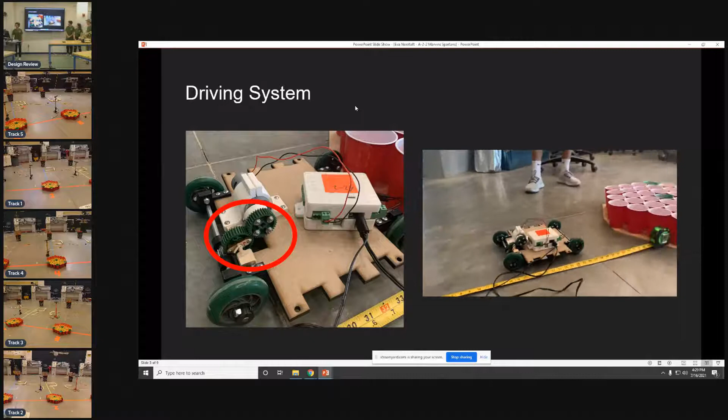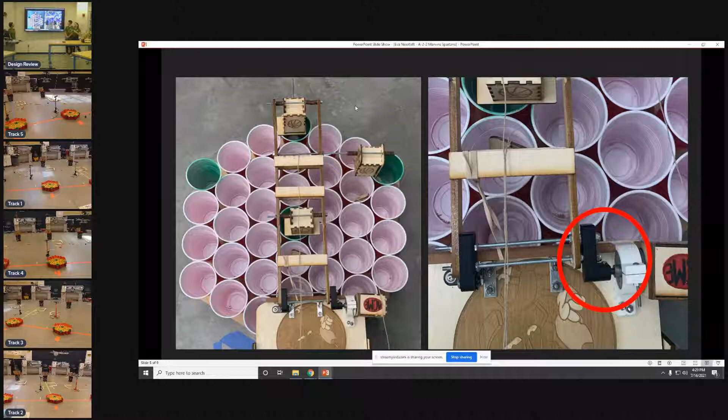Moving on to the arm that Eva mentioned earlier, we have an extending system that allows the arm to start back and then extend out into the forward position, allowing us to score the dunk shots and the 3 green cups. We utilized a Ferris wheel system so that the capsules holding the cups rotate and always stay flat. When they reach the full extended position, the strings holding the doors on the bottom pull taut and the doors pull out, dropping the balls into the cups.

The way we chose to drive this system is through a direct drive motor. We 3D printed an attachment so we were able to take the D shaft of the motor and convert it to rotational motion of the arm. For extra support, we added metal cross beams and a hard stop on the ground, which allows the momentum of the arm to be dampened when it does fully extend.

For the jump shot task, we used a catapult design, with the power mechanism being 2 rat traps. We decided on 2 because initially 1 in previous designs was not enough to allow for sufficient power and adjustability, and was just the bare minimum, so we went with 2.

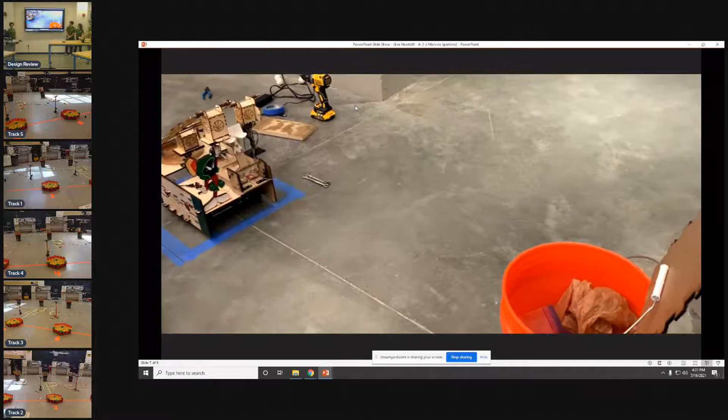The catapult design was a little less consistent, so we did score 2 in the bucket for one of our runs, but on the other runs we had them in a capsule that actually combined them together, so you either hit or you didn't. We revised that mechanism this time so the balls were shot in the same trajectory but didn't interfere with each other.

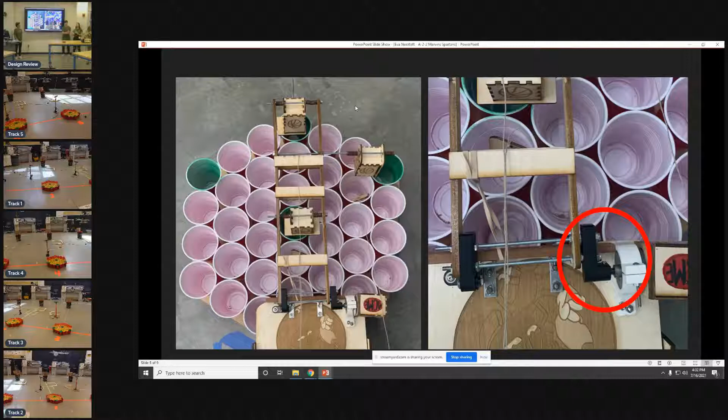We had a 3 ball tall container that was scoring points for the first round, so we only went for the center cup of the honeycomb. We did all right with that, scoring green on 2 out of 3 runs, like all 3 green. But we wanted to push ourselves to get the 3 unique greens for the final competition.

As for scoring, the catapult itself is very reliable, and the long arm tends to score 2 out of 3 in the desired cups we're going for. Sometimes the side one does tend to bounce out, but it's pretty reliable, so we're excited to do the full run.

The reason we did those 3 was the 2 wider cups are actually outside of the starting box, and we wanted to limit the amount of complex motions we needed. So we asked, can we get them positioned in a way that it's a rigid body and we're minimizing movement essentially.

Those 3 we figured out we'd be able to load on without being outside of the starting box. This box actually has a ramp on the side, so it rolls into the green cup, and this allowed us to scoot off by about an inch, so we were able to stay inside the starting box.

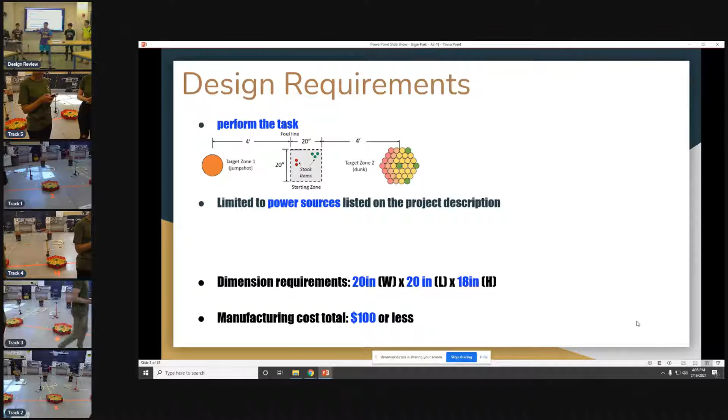Here are the basic design requirements we based all our decisions off: performing the task, the power sources, the dimensions, and of course the cost. Here is the robot that we made. We made it fairly simplistic, because we found the more complex it was, the more things that could go wrong with it. So to get the most consistency, we decided to keep it simple.

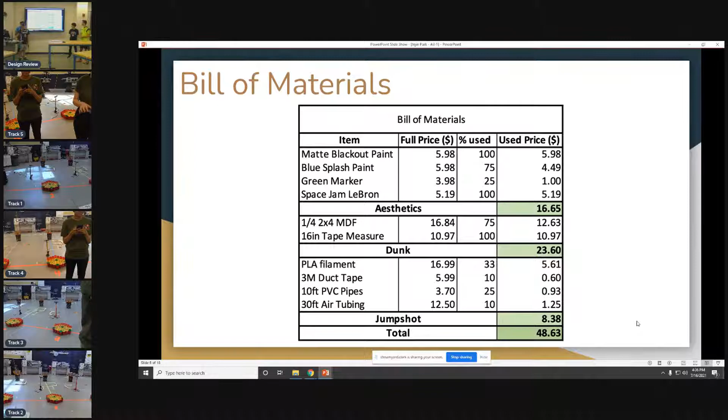Now we're going into the jump shot functionality of our robot. For our jump shot, we positioned it on the bottom of our robot to create enough space for the tape measure to be on top, so it fits right underneath the platform of the tape measure.

This is the jump shot subassembly component, and everything you see in green here is 3D printed. We have this adapter inside to stick the actuator inside the PVC pipe because we didn't want to directly glue on the actuator, so we made this adapter that fits into the screw holes of the actuator.

How the system works: we feed a ball in here, and we have a ball resting here. As the actuator hits the ball out, the next ball falls down, and the actuator hits it again. We ended up going with one actuator because in design sprint 1 we went with 2, but it was inconsistent since the 2 valves were slightly different — one could fly into the bucket while the other only had enough power to bounce it in. So we went with 1 to reduce error and try to get 2 ping pong balls in both buckets.

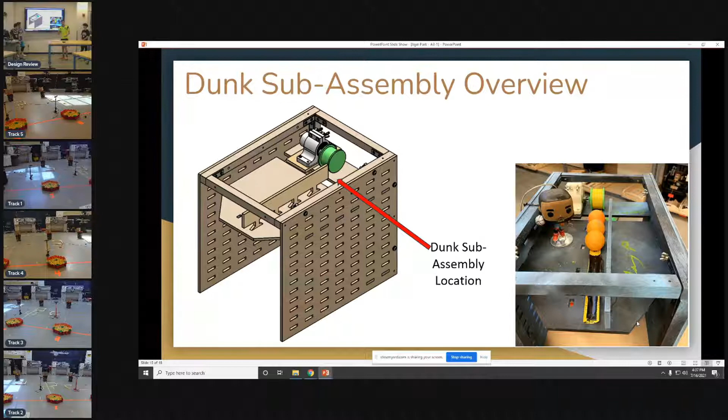Right, so for the dunk — this is the dunk overview, in terms of where it's located in the robot. As Zach said, it's in the top portion, comprising 2 platforms. The forward one supports the tape measure so it doesn't dip a lot at the end. The rear one is where the actuator, the motor, is located, with the purpose of projecting and pulling the tape measure out.

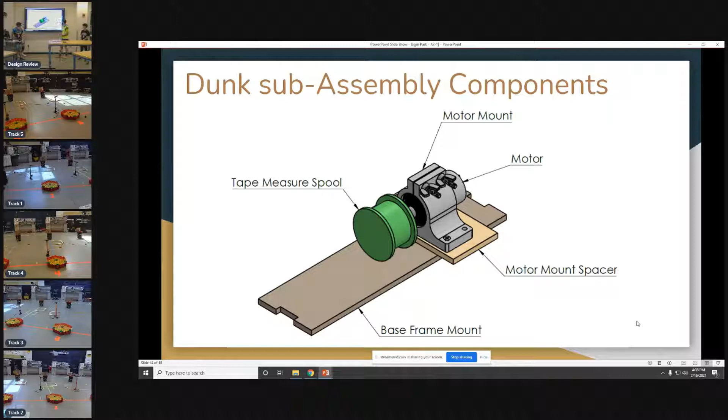The subassembly for the motor includes a 3D printed spool that guides the tape measure, retracting and pulling it forward. That's connected directly to the motor, which is attached to the base frame of the robot. The importance we gave to this design was maximizing stability.

We noted that before, we were trying to place the tape measure in the front, and that caused too much dipping toward the end, so the balls wouldn't reach the cups. So we changed the design and put the jump shot mechanism in the lower end of the robot, pulled it all the way back to the side so we could have a support platform to reduce the dip.

Thanks, just one quick one for me. So the jump shot takes 2 shots in succession, is that how it works? Yeah, so one ball sits already in the cradle, and one ball is up here. As the actuator pushes that first ball out, the next one falls down into the cradle, and then it hits it again.

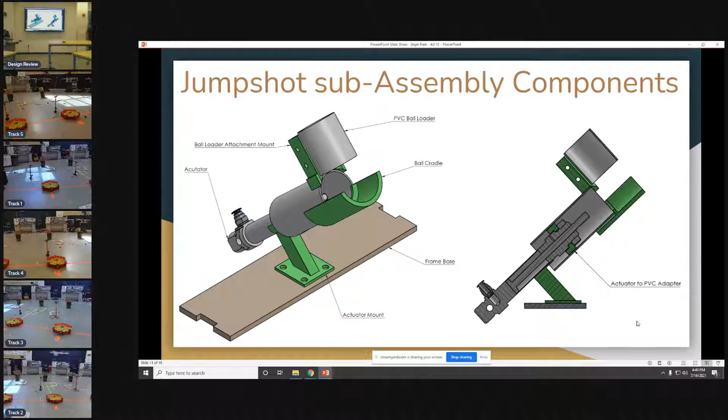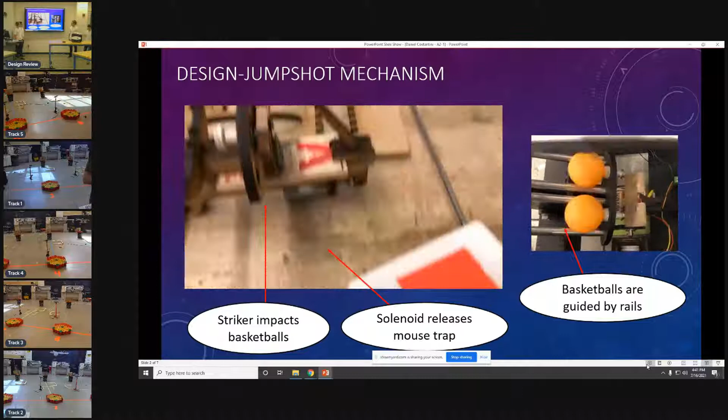Yep, so this is our jump shot mechanism. It's made up of 4 polished aluminum rods for low friction. This is what the basketballs sit on. Behind the basketballs, you can see the 2 white strikers that serve to linearize the momentum of the mousetrap arm. Whenever we want to launch the basketballs, we activate the solenoid, which rotates the catch and releases the mousetrap arm. The mousetrap arms come forward and interact with the strikers, which push our basketballs forward and outward. The rails serve to finalize the direction of our basketballs and decrease any variation you would see on impact.

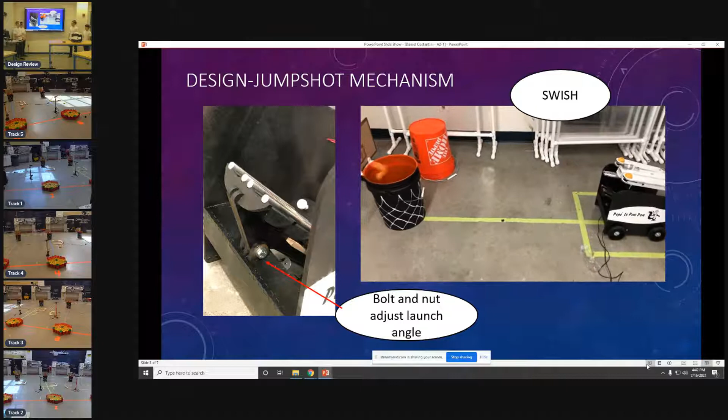And for the dunk mechanism, when the motor jerks the robot back, leaving a pin holding it for an angle, swinging out the wings, and the solenoid and the string to the side will pull the sliding circular bar and force the arm to come out.

The interesting thing about the robot is that it only uses 2 solenoids, 1 motor, a mousetrap, and gravity in order to power it and all its mechanisms. For moving the robot, the axle is a threaded rod, which we wanted to use because it lets us fix the gears and the wheels to the axle while it moves. We also have bearings on the side of our robot to allow the axle to roll freely without any friction.

So overall, in order to give our robot a chance to win, we had 3 things that we wanted to have in mind. We wanted it to be adjustable, we wanted it to have the potential to get all of the points, and we wanted to stay within the constraints of the competition.

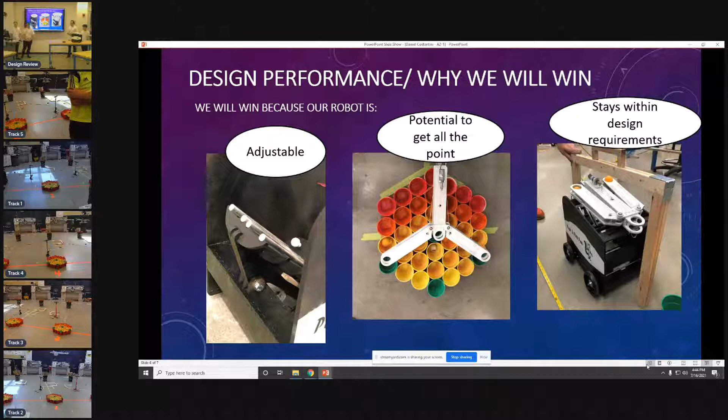Any questions? Great, just one from me. So you don't use the pneumatics at all, it sounds like. No, sir. And how did you decide to avoid that? We just wanted to go with a very simple, clear-cut design. Pneumatics would have been more accurate and maybe more adjustable because we could use the pressure, but we were also concerned about leakages of the tubing and having to deal with packing that into our design.

Okay, thanks. I have a question. I don't quite understand how the white arms go out to get into the green cup. I saw in that video somebody standing there shaking it. I don't quite understand how that really works. Okay, I gotta explain that. So the robot moves backwards right when it gets up, which kind of pulls it back, and a pin drops out that's holding it back.

And so that's what makes the door slide out. The wings start at an angle outwards already, and so when the door slide hits at the end, the momentum keeps going and they rotate outwards. So what kind of trouble did you guys encounter setting that up?

A lot of trouble. Sometimes the center of gravity would change to the upper front and it would tip over. Sometimes the pin wouldn't release, so we had to work with the motors to make sure it jerked enough power to release the pin. Also, just getting the two arms to fling out correctly was sometimes a trouble.

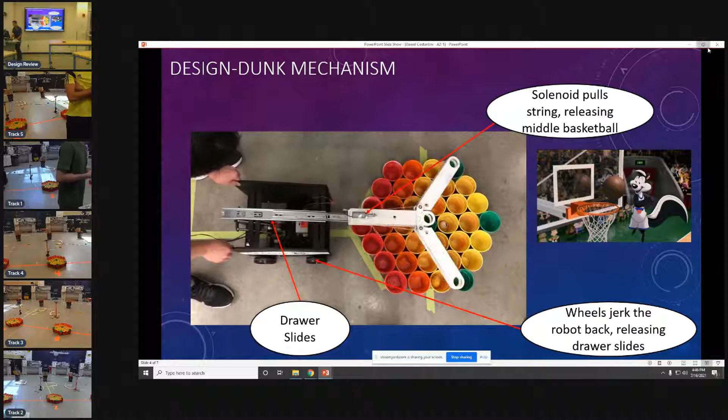Cool, thanks very much. Thank you. All right, so y'all can wait here in the lab or on site and we'll call next week. Are we allowed to test our robot? We're out over there, so you can. Thank you. All right, 3-2. 3-2 or 4-1? Yeah. All right, so 3-2, I think we have two more teams and then we're good. So we're running a little bit behind, right? Just a little bit, 5 minutes. I don't know if I have 4-1. Oh, here's 4-1.

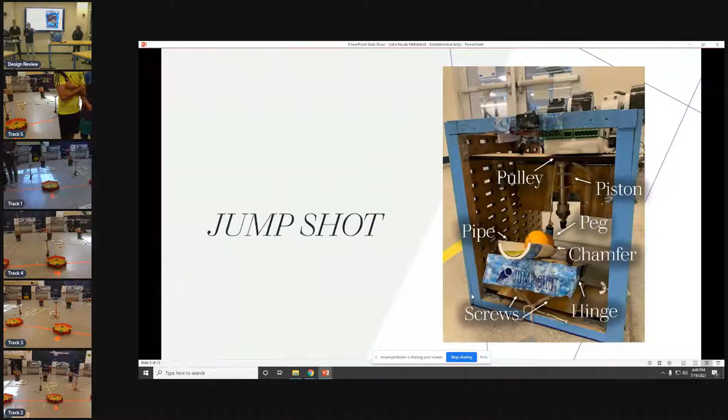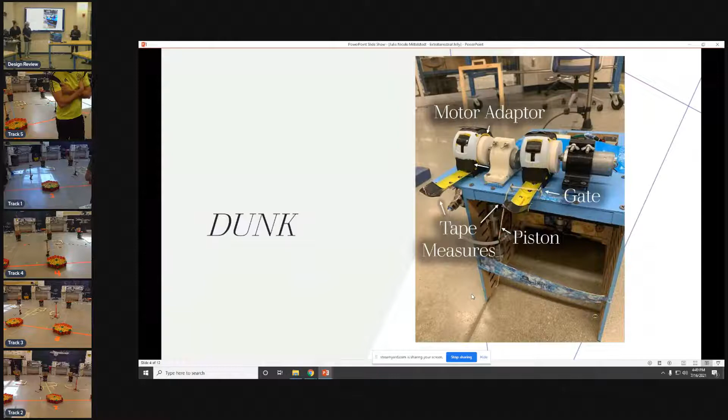Next slide. Next, we have the dunk. As you can see, we have 2 tape measures, which is unique to ours compared to other teams that have 1. They are attached to the motor via a motor adaptor, and there's also a gate system controlled via piston that pulls the rope out to allow 2 balls to deploy at different times.

We had a rickety joint that connected the motor to the tape measure, and that made it a little bit inconsistent. We also had a lot of friction between the tape measure and itself, which made it really difficult for it to roll out. It went out super slowly, and it was hard to get it out far enough. We also didn't have a clear slingshot direction, so it was a bit of a guessing game whether or not it would go straight into the bucket.

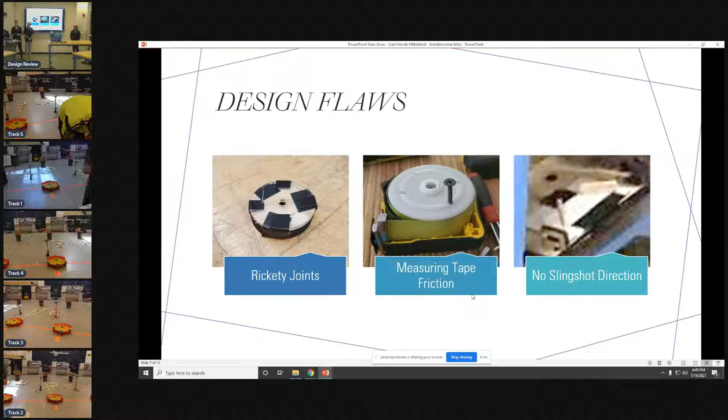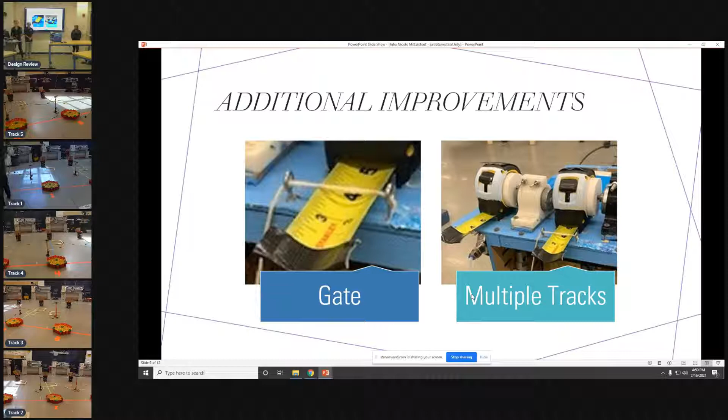So we addressed these flaws for the second sprint, and we have more deliberate 3D printed fasteners. We added some internal lubrication, and now it glides out as far as we need it to go, and even further. There is a guide channel on the slingshot so the balls go out straight in the same direction each time. Additionally, we added the gate so the balls can roll at 2 different times to hit the front center and back center green cups. We also added multiple tracks to get the ball into the third green cup.

And because of these improvements, here's a video of one of our demonstrations to show that we are much better prepared for Sprint 2. And so the measuring tapes extend.

You can see that as they extend toward their final distance, they sag a little bit, causing the balls to roll down them into the cups.

And if you look really soon, you see that the slingshot launches them. One went in, one bounced off the back rim but hit the back square. From these instant replays, it's just all over, much more successful and a stronger design.

Does anyone have any questions? Just one from me. Is it fairly repeatable? How do you align where it drops to the actual ping pong balls? Is it like timing, or what?

The time release, we use delays in the code. So this one is offset by like a couple hundred milliseconds, so it gets farther in the corner.

Any other questions? How's the consistency and repeatability in terms of scores and scoring averages?

The tape measures became way more consistent when we added WD-40 inside, because it used to create a lot of slack, but now it's very consistent on the distance out. The jump shot is a little less consistent because they move at a higher pace, and the rim might cause some issues when it hits the back rim and kind of goes crazy.

I will say, speaking to the slingshot portion, it consistently gets one in the bucket every time. The reason the second one doesn't go in actually echoes real basketball, because it goes up with a lot of force, and so sometimes it will bounce off the rim as opposed to bouncing into the bucket from the back rim.

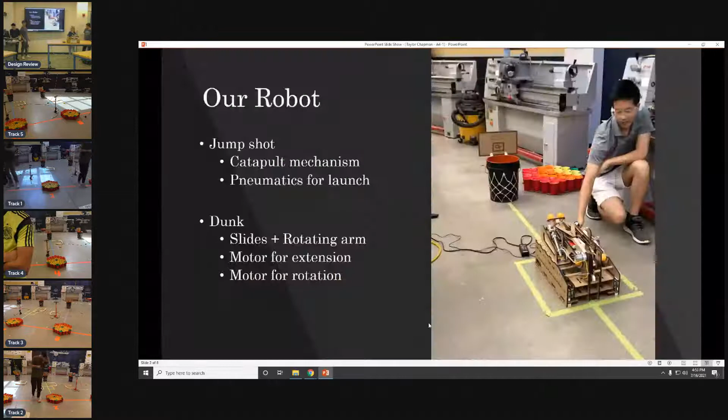So for the jump shot, we use a catapult mechanism that can hold and launch the 2 red balls at the same time, and it's powered by pneumatics. For the other side of the robot, for dunking, we use a 2-stage slide plus a rotating arm, and the 2-stage slide is powered by a motor and a string and pulley system.

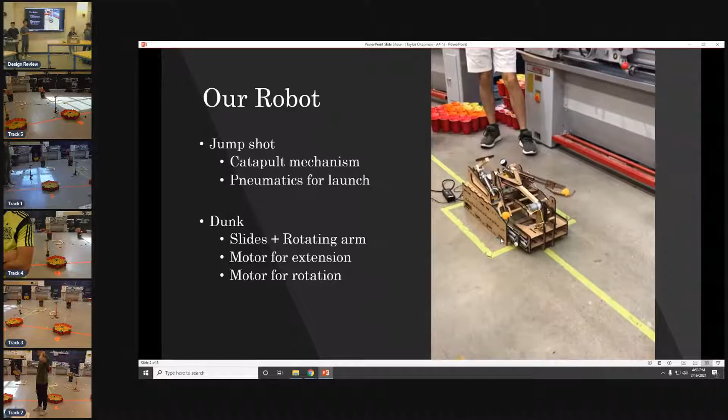So the dunk mechanism can store all 3 green balls and dunk them into 3 different green cups at the same time. As you can see in this video, our robot is able to get the maximum score in a single trial, and this is also very consistent, as we tested out earlier this week. It can get the maximum score a couple times in a row.

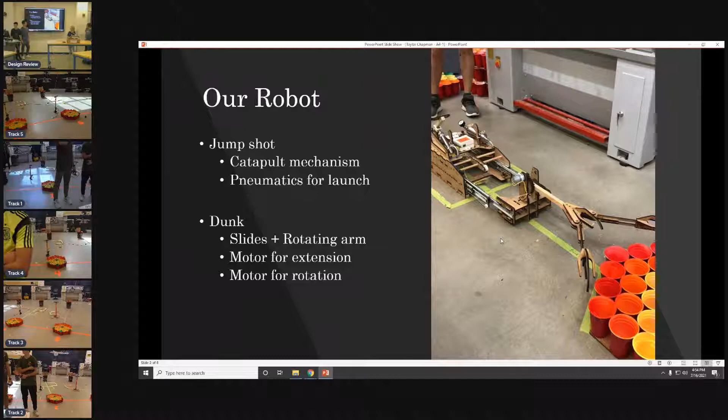So we made our slide mechanism very compact so that we can have more space for the jump shot mechanism and dunk mechanism. This also gives us a really low profile side plate that makes it more aesthetically pleasing.

And since we are mainly using MDF boards and laser cutting, it made it really easy for us to make plug-in structures, and we can use minimal fasteners. This is really helpful when we are repairing our robot, making prototypes, and testing out new designs.

So the compactness that Tim was just talking about can be seen on the right. Another unique element that we really liked about our design was the stationary base with an extending arm. One thing we observed with a lot of other groups was that usually the entire robot would move towards the targets.

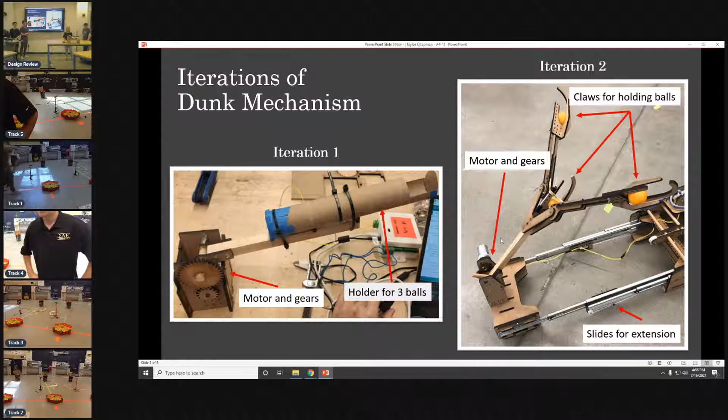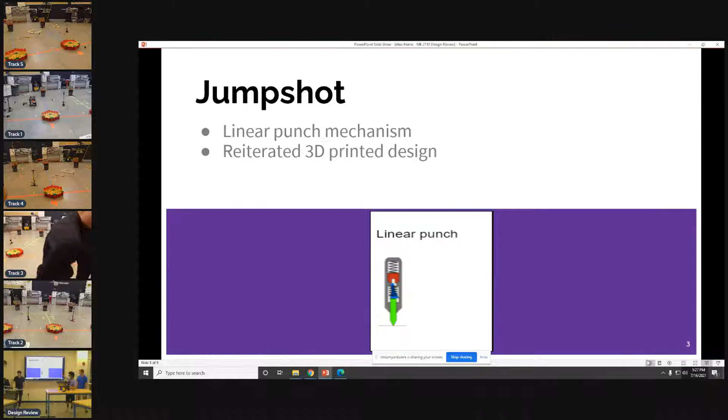So moving on, Travis with the rack thing. We noticed a limitation in the mechatronics kit for producing linear motion beyond the 6 inches of the actuator's extension. Our solution was a rack and pinion gear, which converts rotational motion into linear motion through the use of a circular gear and a straight toothed rack. The advantage is it gives us controlled motion at the same speed every time, and with timing of the motors we know exactly how far it's going to go, giving us as much linear motion as we can fit in our robot. At the end, we have a passive ball release: once our rack and pinion reaches its maximum length over the center green cup, a tension rope pulls a flap outside the container and drops the ball directly into the green cup.

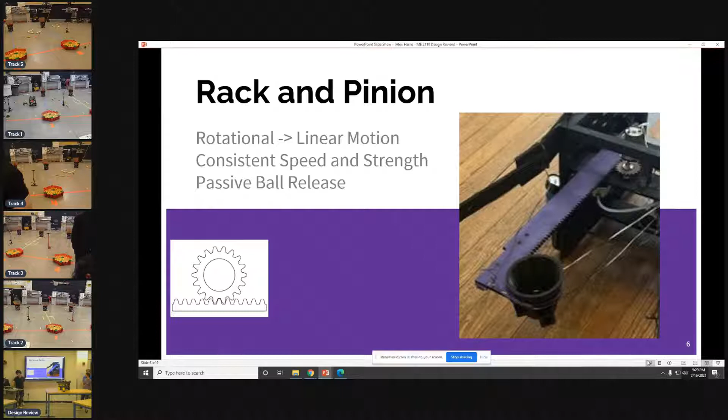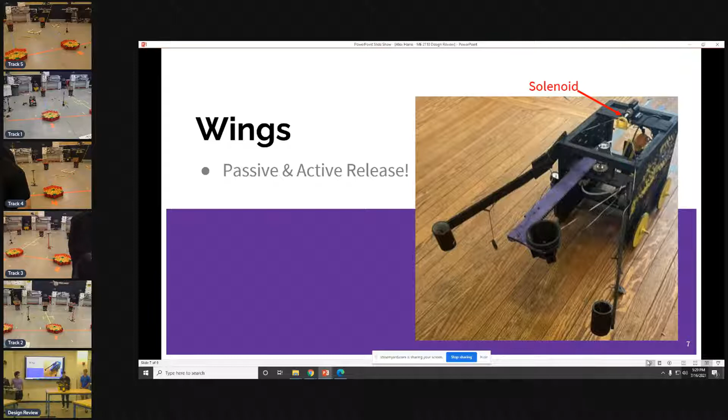So it came down to our final upgrade for our robot. We decided to use wings, which are passively released as we extend our rack and pinion. As it extends, these wings swing out and hit the 2 outermost cups, which we targeted for the maximum amount of points. After they're out, we have an active release with our solenoid at the top, which extends and releases our disc slots and drops the balls into the cups.

Any questions? Is it fairly repeatable, like how it came back? I was worried that you were going to go too far. Yes, it bounces, but it always lands in the correct position at the end.

The wings are angled downwards to assist with the motion, so it rests in that position at the bottom there, and the flaps don't come out until the solenoid pulls them up. Did you design it where they just go and stop?

Probably, but not in the time frame we have. The limitations with how many different sources of power we had, time constraints and space constraints within our robot, and once we saw that we could consistently make that shot, despite the fact that it bounces, we didn't see a need to tweak it or spend extra time on that with A/B testing and making it perfect.

So you put your rack and pinion vertical instead of horizontal. Did you experience any issues with that? The shaft for this motor actually goes through the bottom of this plate here, and that provides stabilization for the gear. Since the rack and pinion is on this drawer slide, it's attached in 2 places to different panels. Oh, it's on the drawer slide. Yeah, it's just connected directly to this drawer slide, and as a result we don't get a lot of loss or anything.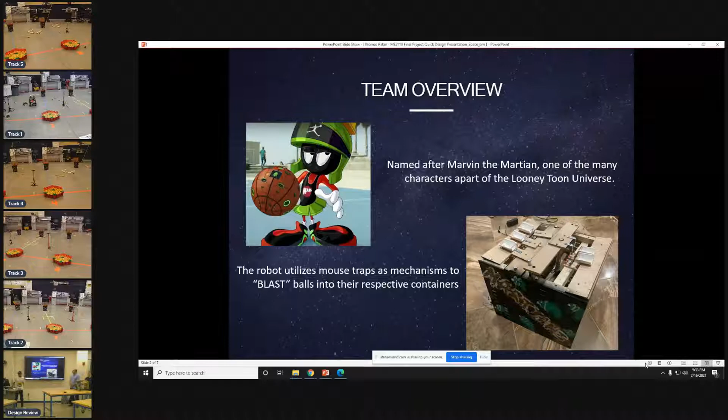Click the slides. So, team overview. We got our name from Marvin the Martian, one of the original characters from the Looney Tunes universe. Our robot utilizes 5 mouse traps that blast balls into their respective containers, that's why we have the blasters on the machine. This is just some images of the machine here, and 'puny earthling' is one of his sayings, so we added that to the machine as well.

So how does our machine work? Our machine utilizes 5 mouse traps, 2 for the jump shot and 3 for the dunk. The mouse traps are held back by L brackets that are installed to actuators. Upon activation, the actuators will lift the L brackets, releasing the mouse traps, and the machine is activated by pushing the press button.

And that leads us to the following question: what differentiates our machine from the other machines? Simply the exploitation of the mouse traps. We decided to use 5 mouse traps to show you the effectiveness of this machine that operates by a single, low-cost horsepower.

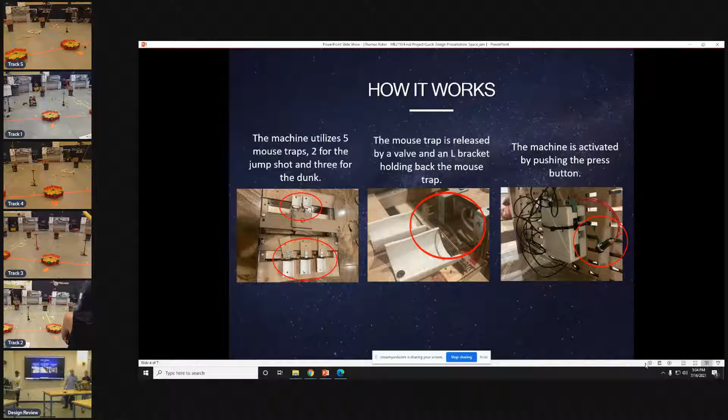Since we used mostly things that were just given to us, our main cost was just the wood to create a bigger robot base so it didn't move as much when our pistons fired off, and it was below half our budget. Again, our uniqueness is just using mouse traps, I believe. I don't think any other team used any, and definitely not 5. Any questions?

How's the power? Is that kind of where the balls are landing on the dunk pass? On the dunk, not as reliable, our 25%. For our jump shot, yesterday it was like 1.7 balls per attempt for 30 trials, so fairly consistent for ours.

Any other questions? So it doesn't move on wheels, right? You have wheels there for kind of just like aesthetic. Yeah, okay, great.

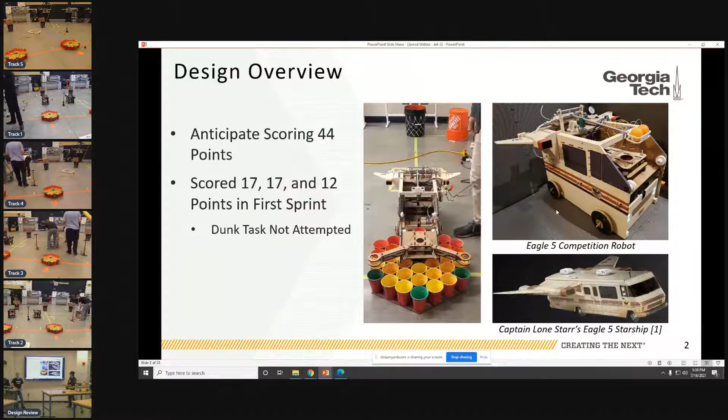Now for Wyatt, for the jump shot mechanism. First the air tank is filled, then when activated, the robot opens the actuator valve, which extends the pneumatic actuator. The catapult arm, which lies in the groove of the actuator adapter, is accelerated by the pneumatic actuator and rotates until it contacts the angle limiting bar, at which point the red stock items are released from the payload bucket and projected towards target zone 1.

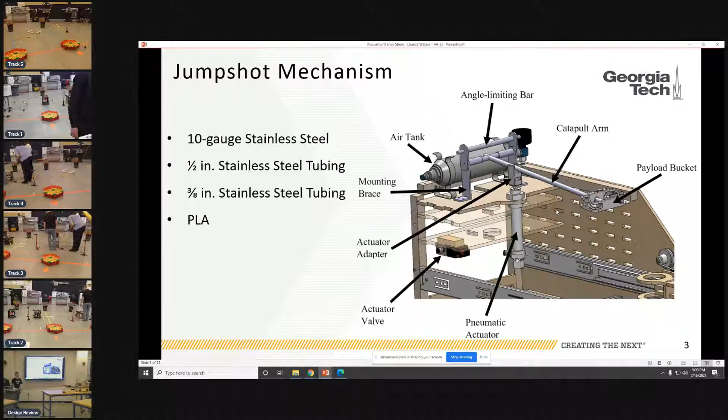The catapult is made out of stainless steel plate and tubing. I decided to make a catapult out of metal based on my experience in metal fabrication. The metal construction also offers durability, which is important because the catapult arm is impacted by the angle limiting bar and the linear actuator and is less likely to bend or break. It also offers a slimmer compact profile, which is important because it was not designed with a particular final location in mind. And finally, it offers a lower coefficient of friction than wood or plastic, which eliminates the need for bushings. And to talk about the dunk mechanism, here's Nolan.

Thanks, Wyatt. To transfer the item into target zone 2, our robot makes use of a drivetrain and an IR sensor. Once the robot reaches target zone 2, the IR sensor will signal the drivetrain to stop and start the pulley spool motor right there, and it will expand out the drawer slide assembly. Once the drawer slide assembly reaches the end of travel, this limit switch right here will stop the drawer slide from overextending and damaging the robot itself.

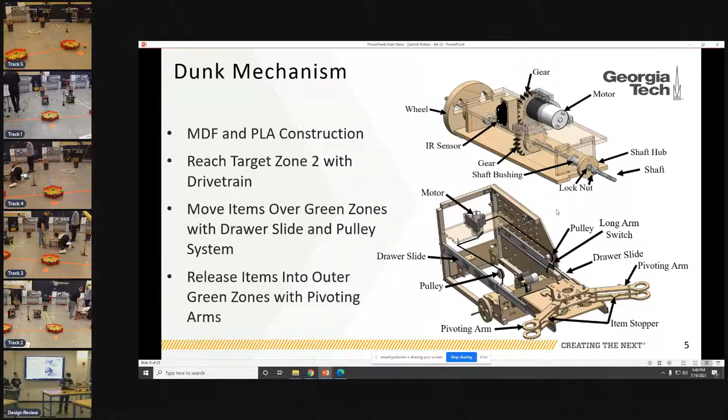And to deliver the item into the outer green zones on the target zone, we make use of 2 pivoting arms. They are powered by a rubber band right here, and they are kept locked in place by this locking mechanism. One unique point about our dunk mechanism is the use of a cam and follower system. The follower is kept engaged with the cam surface through the use of a rubber band right there. And well, because we already use 2 motors and an actuator, we must figure out a way to trigger the locking mechanism.

From our testing, we found out that the solenoid is too weak for our need. So we decided to use a tensioning cable system. It was triggered by when the drawer slide reached the end of travel, the cable will tension and trigger the mechanism and release all the balls.

Any questions? Just one for me. So as the arm's swinging out, is that propelled forward by a notch track, or what is it? It's propelled by this rubber band right here. Oh, okay, nice. We kept it so it doesn't damage itself. Any other questions?

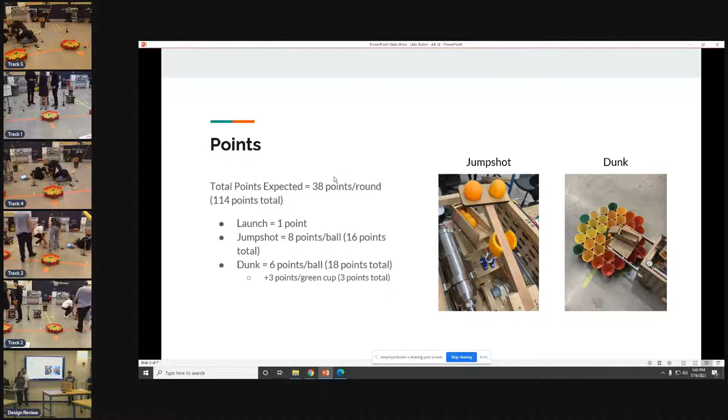Two things that we thought made our design really unique: using a passive string to open our trapdoor. As the drawer slides go out, the string gets taut and pulls the hinge open, allowing the balls to fall out. Additionally, we were able to use most of our ball launcher from the interim design competition to support our catapult, which saved us both time and money in fabricating new parts.

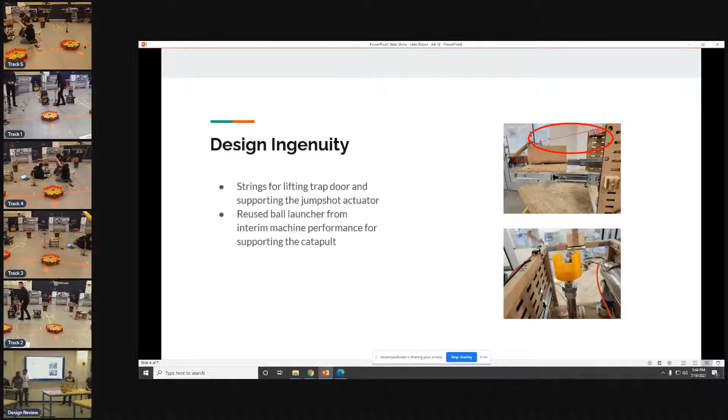As you can see in the photo snapshot from the interim design competition, the second jump shot ball scored 0 points across the board, whereas the first jump shot ball scored a maximum of 3 points across the 3 rounds. For our bot's reliability, we decided not to incorporate any sensors into our bot due to the drawer system having too many difficulties with that, so we decided to instead use a time sequence.

We also had to make a cardboard cutout template that would help us angle the bot in the starting zone in a way so that we can make consistent distances to the dunk zone. Lastly, for our launch mechanism to have the proper amount of outputs for the buckets, we determined a PSI value of around 45 PSI to set each time.

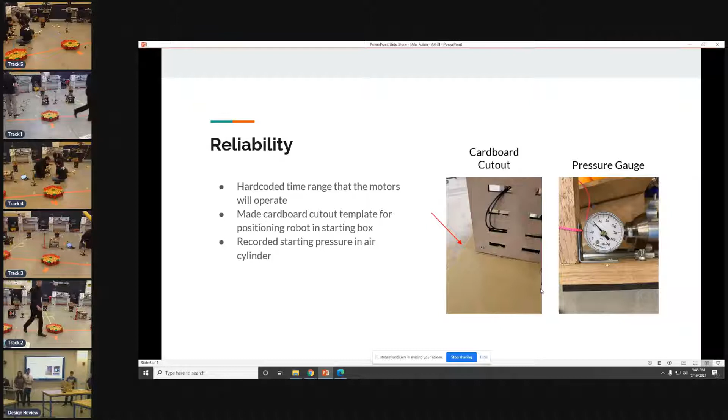Thank you so much. Just one question: since it's moving forward and getting to the green cups, is it putting all the balls in the same cup? Yes. And how do you align it in the starting zone, using the template you have there? Yeah, so in the template we currently have a pencil marking of where that edge goes on the robot so that we can angle it correctly. So it'll drive and then hit the green cup every time.

Any other questions? Alright, great, good job. So again, for the laboratory, we're gonna run the system. Okay, alright, thank you. Thank you. Do I need to do anything with this or no? I can take care of it. Okay.

That was a 4-3. That's jumping the gun, was that? That's jumping the gun, what? Oh, I was already getting it. Oh, we're done. Oh, that was it? Yeah, oh that was the last one. We're only 7 minutes behind. Not too bad.

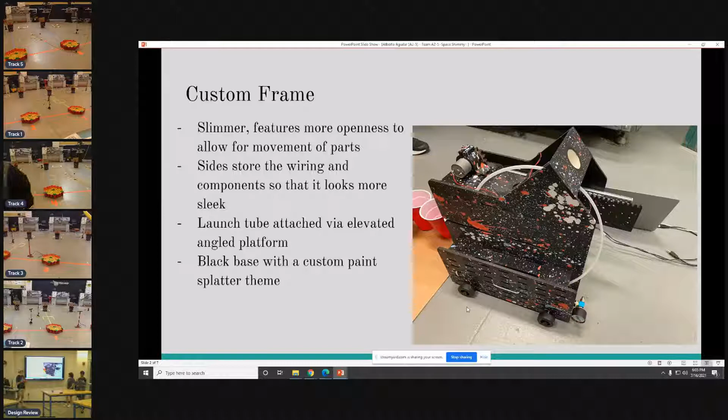We're going to start off with the frame itself. We modified the original frame to fit our mechanisms better. In the first round, we tested out our mechanisms to make sure they worked, and then we put them all together into one cohesive frame that you see here before you. We also splatter painted this with the colors of Space Jam, and used all the available space to best fit our robot.

As far as the jump shot goes, we decided on settling for an air pressure approach rather than the mousetrap, just because we found that with the mousetrap, there was a risk of the spring itself feeling too much strain. As far as testing purposes went, the air pressure way was a little bit more consistent. The only downside is that after we take it out to test it, the air pressure leaks out, so we have to be very precise with that. We saw a lot of groups going for 2 cannons. We decided that one was perfectly fine and just enough, and in all of our tries, it's been pretty successful.

Oh shoot, there was a video here. We apologize for that. But this was our Sprint 1 prototype, which was in the original frame. It was showing the jump shot successfully completing from our original frame, where it was off center and all different kinds of things, but the concept of it worked.

Here it is, sorry about that. If it loads. Well, okay. It's okay, no worries, that's what it was. For time's sake, we'll go ahead and continue with the dunk.

The dunk originally had the idea of using gravity and the drawer slide to move forward on wheels. We opted to use 2 regular gears on the motor and strap that down to move it. The drawer slide mechanism works as dowels holding the balls in place in the holes. Using the rolling button, which we found out we didn't need to use time for, we use the rolling button to effectively not have to measure any time or distance, just have it stop immediately at the point of the cups. Once the dunk extends, there's a string on the back of the robot, I don't know if you can see it, that will extend, and by the motion of the dunk slide extending, it will pull, and then the balls will drop.

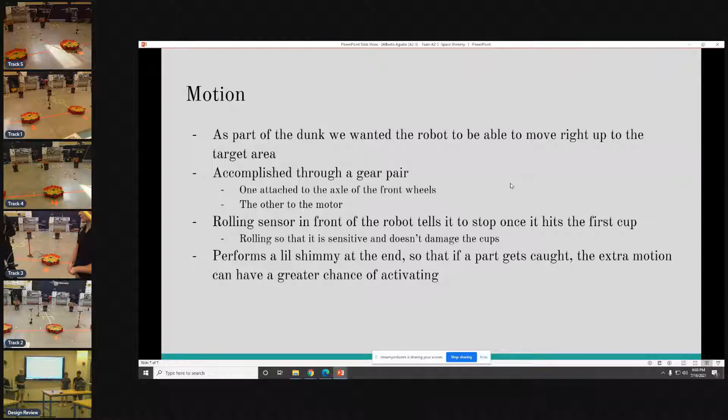For the motion part of it, we use just a simple gear mechanism attached to an axle, motor, gear, axle, and then the wheels. We use the button mechanism to stop the motion of the gears. Yeah, I believe that is all we have.

How many points are you all expecting to score? Fairly repeatable, like what's the? We are going for the max. So this one out the side is going to go, there should, in theory, if geometry works, go to the side cup. And then there's two holes, I believe we can extend it out a little bit, so there's a hole like this in the front and a hole in the back that should go into the middle cup and then the back cup. We are expecting to shoot 2 balls into the Home Depot bucket.

Okay, great. Any questions, Spencer? Yeah, what's your overall cost? Our overall cost was, I believe, around $70. And if you got double the budget, what would you do?

Honestly, not all that much. The vast majority of this was MDF, which was extremely cheap at Home Depot. And that kind of made it all come together fairly well.

You want to do anything to improve the accuracy, even with double budget? I'm trying to think if there's anything y'all would change.

Yeah, probably the pneumatic system, making sure it doesn't leak once you pump it up to a certain amount. But I think that would be just about it. Everything else seems to work fairly well. Maybe better dowels, because we've had some issues with those. Yes, one of those broke about 20 minutes ago. So we have had to replace that, but that would be it.

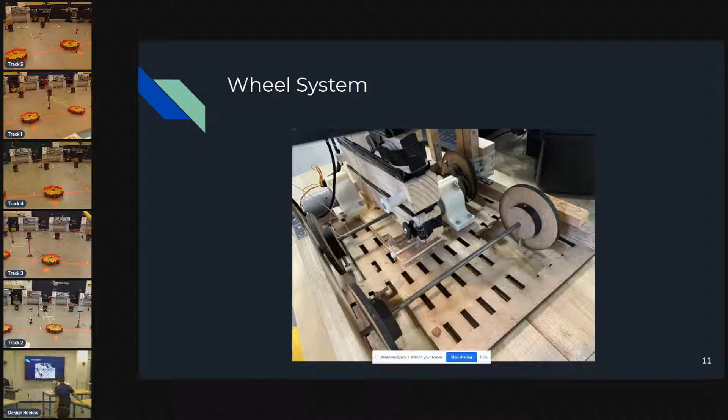You want to take it? No, all the time. I think put it together. Just so we don't have to keep moving it around. Leave the map? I think I jumped the gun, so yeah, it's 3-4 now. 3-4.

Is your slide deck right? Yes. Kind of speed up, it's like been raining, so, yeah, with that. Hey, you can set it there. If you want to put your robot up there, you want to do what you want to do. Okay. You want to do that.

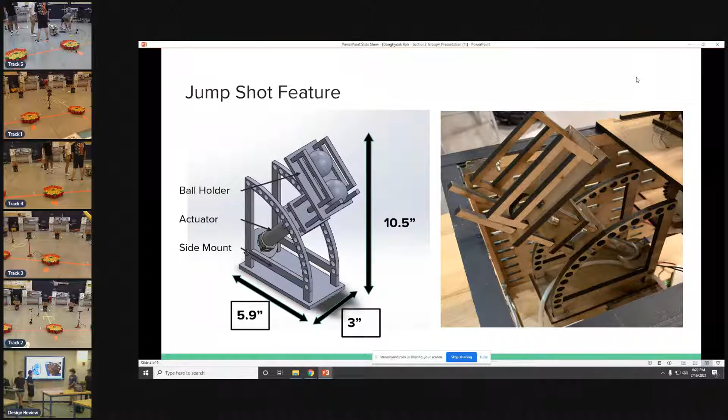This is a quick sample video of the jump shot. So for the dunking feature, right off the bat, we went for a perfect score.

As you can see here, we have 3 tape measures, each going for different green targets to get the maximum points. What's unique about our design is that some other teams use tape measures too, but we're the only team, I believe, that has all 3 of our tape measures being pulled by one motor.

We did a gear chain with one motor that attaches to a dowel, and that dowel is attached to all 3 of these yellow strings. We pull the strings down and then they extend out. That's allowed us to use our other motor, which is attached to all these black strings, as a way to activate the release mechanism.

Here's an example of all of our tape measures extended, as you can see over here, showing all 3 strings.

Our design here is rapidly manufactured and rapidly installed. We only use items that involve measuring tape, string, and paper as well. Our final cost is $55.04, the lowest among the given money.

Any questions? How's the reset of the tape measures? Manual - once it goes out, we have to roll up the tape measure by hand.

Yeah, we can do it within the 3 minutes. It's fairly intricate, but it doesn't take an unreasonable amount of time. With a lot of practice, you get pretty quick at it.

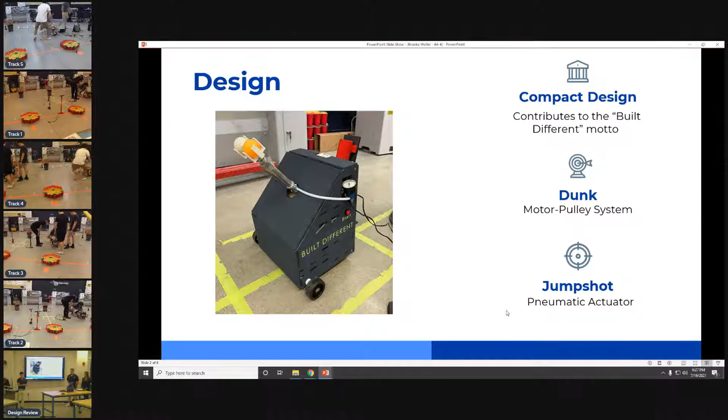What also stands out is we have these buttons right here, labeled for the start button, and this button for wheel up and down, the dunking mechanism. The dunking mechanism is a motor pulley system controlled by those buttons if needed. The jump shot is controlled by a pneumatic actuator. The ball holder isn't on there right now because it's kind of fragile, but you get the gist.

Here's the design evolution. For design sprint 1, since it didn't need to run or move, we just had 2 pneumatic actuators which shot both into the dunk and the jump shot. And that's our final design, as you can see.

So we'll talk a little about our fabrication approach. We used mostly laser cutting and 3D printing. We laser cut our MDF, using inspiration from the original frame but changed it a bit to make it cleaner. There's still some adjustability.

We 3D printed this piece here, which holds our 3 balls for the dunk, and the 2 balls up there for our jump shot. The 2 ball holder is a bit fragile, so we actually have 2 of them as backup in case something happens. We 3D printed the ball holder so we could easily dump into the cups while holding the balls, and it just lowers down.

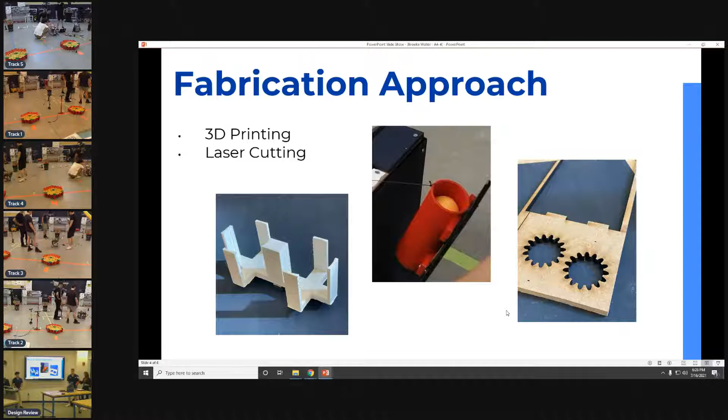We also have gears that we've actually hidden. Most of the internal components are hidden, cut out of MDF, to run our motor robot.

For competition effectiveness, there are 3 main things the robot aims to do: launch, complete the jump shot, and dunk. The launch is very consistent. We have the button on the front, and the code runs the same way every time, so that has 100% reliability and gives us 1 point.

The jump shot, we aim to get 6 points by hitting the bucket with both balls. That happens about 90% of the time. Sometimes a ball will bounce into the cup, sometimes it'll bounce and go a different way.

So that has 90% reliability, and then we expect 21 points for the dunk. It should drive up to the same spot every time and drop all 3 balls into one green cup. That also has 90% reliability depending on if the wheel moves or something like that.

In the future, we want to increase reliability, maybe adjusting our drivetrain system or our pneumatic system to make the jump shot more reliable.

Thank you. Great, just one question for me. I'm still confused on how the red tube works—how is it going to deposit the balls?

So basically, it's coded so that once it gets to the cups, this will lower down for the string here. It has tension in it right now, and then it will lower down. We have these controls in the front, which obviously aren't for the competition, but made it really easy for us for setup—we have control of lowering this in and out, so we don't have to go in and wind up a string. It's very consistent and gives us a lot of control as we set up, making the setup faster.

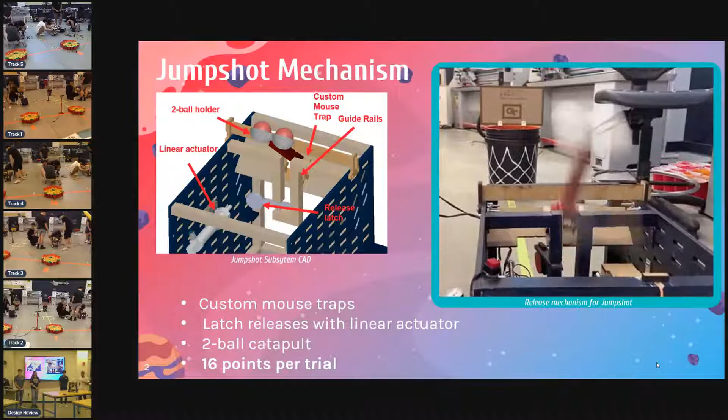Our jump shot is pretty consistent. In the first sprint, using a much rougher mousetrap design, we got both balls in 2 out of 3 trials, and that got us 2nd overall in the jump shot category. We're also expecting 16 points, and it hit the target zone 100% of the time.

Next, I'll explain our dunk mechanism. Our dunk mechanism involves a streamlined approach to targeting the center green cup of the target zone. After Mr. Slackhammer attempts his jump shot, we've equipped him with a direct drivetrain, which is basically a laser cut wheel connected to one of the motors from our mechatronics kit.

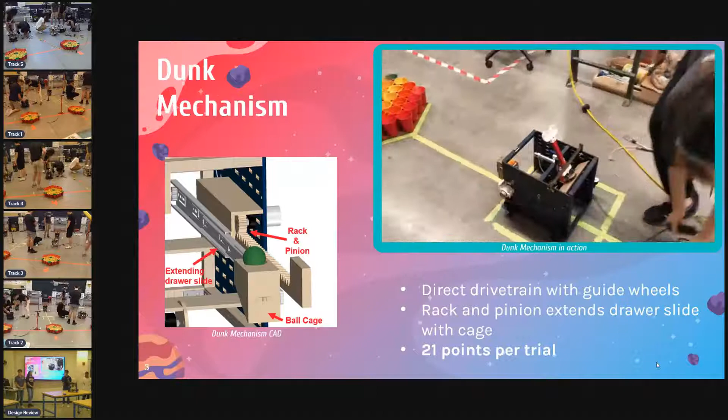As he approaches the target zone, we use an IR sensor that stops the robot approximately 1.5 inches away from the first red cup. Next, we've created a customizable rack and pinion design that extends a drawer slide that approaches the center green cup, and a string latched to the top of the frame tensions and pulls back the front of the cage, allowing all 3 balls to drop into the cup.

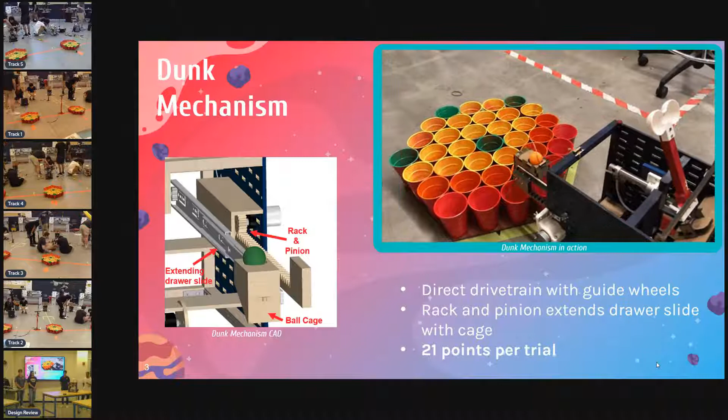With this design, we're looking at about 21 points, 6 for each ball, and 3 bonus points for getting it in the green cup. With a lot of testing, we're pretty confident in this design, and to make sure we don't disqualify ourselves, we implemented a kill switch timer that stops all motion in the robot after 50 seconds.

So what sets us, Mechanical Monstars, and Mr. Slackhammer apart? First and foremost is its repairability. As you can see from the parts we passed around, if something breaks during the competition, we can easily swap it out, and most of them are laser cut and easily produced.

His simplicity is his greatest strength. Things break, that's a fact of life. The truth is we're ready when things break with easily replaceable parts. Coming from the simplicity, it gives consistent performance at a low cost, with the total cost coming in at just over $46. Furthermore, we're one of the only groups to utilize the mousetrap to directly power the jump shot mechanism. Thank you for listening. With the Mechanical Monstars, we're ready to demolish the competition.

Are there any questions? So the IR sensor is picking up on the front cup, is that what it's picking up on? That is correct. It's pretty repeatable? Yes, it has been consistent nearly 90% of the time. Excellent. The only problem we run into is if it turns, then it could pick up the side cup, but it's pretty consistent with picking up the first red cup.